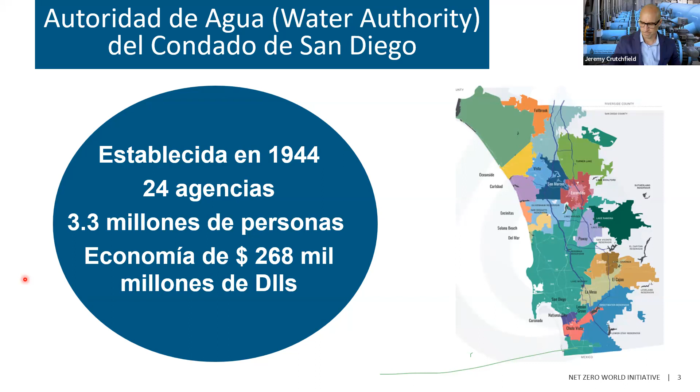A lot of our water comes from the Colorado River to the east, and also from the State Water Project in the Sacramento Bay Delta in the north. So there are a lot of pipelines and pump stations to get that water down to San Diego—that's one of our challenges. Being a large economy with a large population, water supply is very important, and we have to do a lot of planning to make sure we have that water.

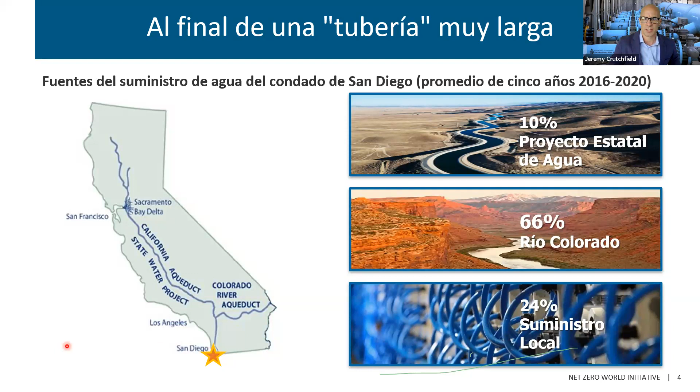To tell our story, we look back 20, 30 years at the path we've taken to diversify our water supply. In the 1990s and earlier, nearly all of our water was imported from outside the region. We bought water from the Metropolitan Water District of Southern California, up in Los Angeles just north of San Diego, and relied on them for 95% of our water, which came from the Colorado River and the State Water Project.

In the early 90s, we were in the middle of a multi-year drought. We were cut back about 30%, losing 30% of our water, with the potential to lose up to 50% of our water supply for San Diego. That impacted everything—our businesses, our agriculture, our quality of life in San Diego.

Fortunately, in 1991, we had what we called a Miracle March. We got a lot of rain that filled our reservoirs and took us out of drought. But our business community, our farmers, and our residents said never again, and they tasked the Water Authority to diversify our water supply portfolio and not be reliant on water coming from outside our region. So over the last 30 years, we've invested a lot of money and started that diversification process.

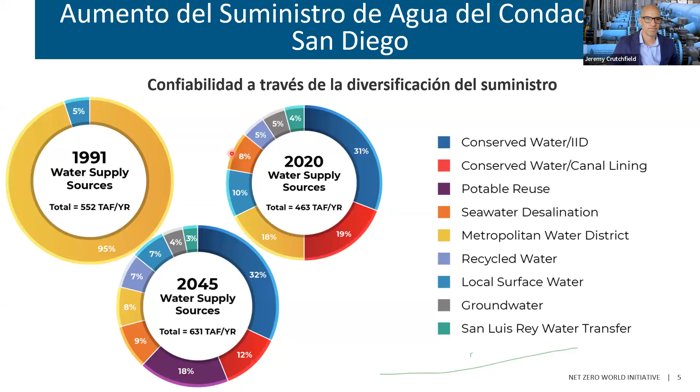So why seawater desalination? The main reason is resilience and reliability. The Pacific Ocean is the largest water source in the world, right on our doorstep, right outside our windows. So we had immediate access to locally controlled, locally available water. It doesn't depend on snowpack, it doesn't depend on rainfall—it's always there and available.

The process of seawater desalination also produces very high quality water that doesn't have much salt or salinity in it. That's an advantage for a lot of our residents and farmers as well, removing a lot of the salts from the water before they use it.

Seawater desalination also gave us local control of water instead of having to import it from a long way away. And it's something that complements reuse and recycling—seawater desalination is a new supply that can be used over and over and over again through our recycling and potable reuse projects.

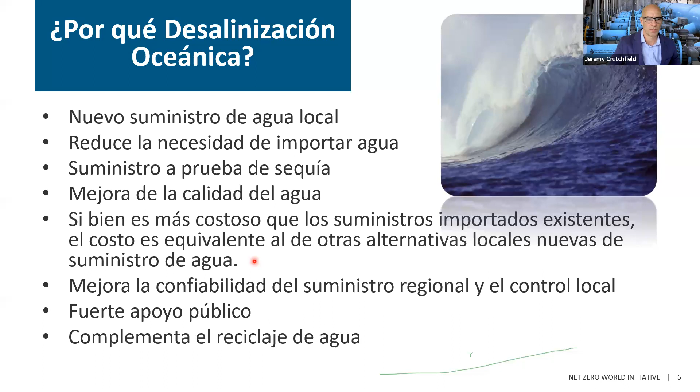Now I'll focus specifically on the Carlsbad desalination plant in San Diego. It's a 50 million gallon per day facility, the largest seawater desalination plant in the United States. We talk in acre feet when we talk water. One acre foot of water is enough to serve about 2 or 3 families for a year, just to understand the quantity we're talking about. This facility can create 48,000 to 56,000 acre feet per year, enough to serve about 400,000 people in San Diego County. Again, this is 10% of our water supply.

The facility was developed through a public-private partnership, meaning we partnered with the private sector to build and develop it. As a public entity, we're pretty risk averse. We know how to move and distribute water, but treatment is not one of our expertise areas, so we leveraged the private sector to build, develop, and operate this plant. This also meant the risk transferred to them, not only operational and development risk, but they were required to permit and finance the facility.

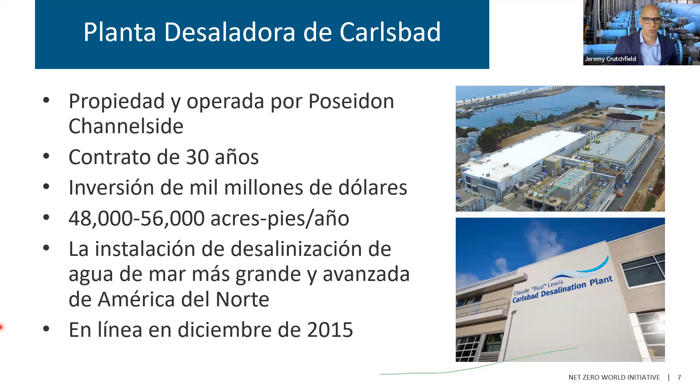A little about the contract and the partnership with the private sector: the Water Authority is under an agreement with Poseidon Channelside as the private entity. They were responsible for developing, permitting, financing, and now operating the facility. They hired a contractor to design and build the plant, and also hired IDE Technologies to help design and operate it. IDE is an Israeli company that owns and operates many seawater desalination plants around the world, so they're a very reputable company.

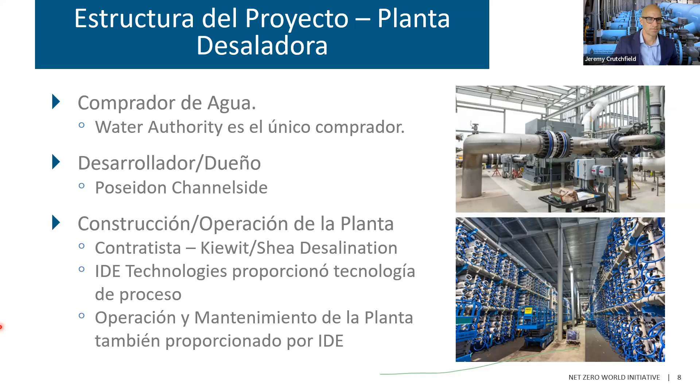The Water Authority's infrastructure, however, is not along the coast, so we also had to build a 10-mile pipeline to bring the desalinated water into the Water Authority's system. Pipes, water movement, and conveyance are things we do know, so we entered into a different type of contract to design and build the pipeline. But once it was constructed and commissioned, we took over operations. We actually own and operate that pipeline; we just don't own and operate the plant directly.

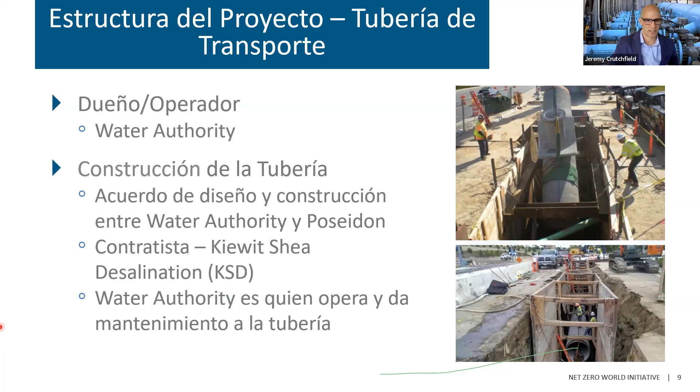I talked about the economy of San Diego, and one thing the business and farming sectors mentioned back in the 90s was that water was a very valuable and necessary component of their success and the growth of our economy. Water reliability was something we prioritized, partnering with business and industrial sectors to promote and achieve diversification of our water supply. San Diego has a large economy with agriculture, biotech, manufacturing—pretty much any sector of the economy or workforce you can think of is in San Diego, and water supply touches all of that.

But it's not just the water supply that ties to our economic growth. The facility itself produced a lot of jobs and opportunities. The construction of the plant introduced about 2,500 new jobs to our communities in San Diego, a lot of those in the trades. One thing we're seeing in the US, but specifically in California, is our trade sector aging, getting older. So we're really trying to get younger students to look at the trades—becoming a welder, a pipe fitter, an electrician. Those are great jobs, and a lot of those were hired into the development and construction of the desalination plant. We also have to look at all the different vendors, suppliers, sales force, and other indirect jobs created in the construction. It took 3 years to construct, so it was a large engagement of different trades getting into the project.

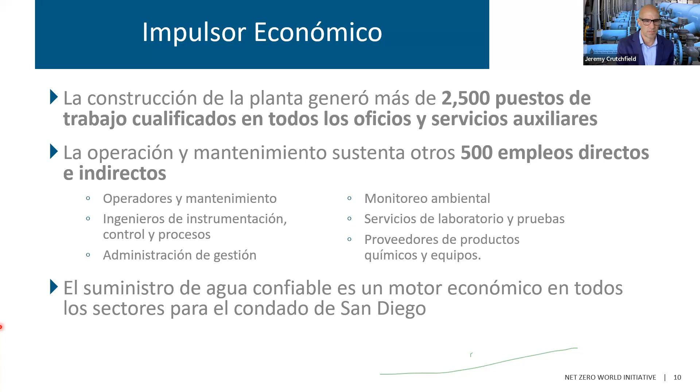The operation of the plant also employs a lot of different players. Only about 45 to 50 full-time staff are at the plant to operate the facility, but you have to look outside of that too—the folks doing monitoring, testing, lab technicians, supply of chemicals, materials, equipment, vendors. There's just a lot that goes into operating and maintaining a facility of this size, so you're again looking at a lot of job growth in our area and economic opportunities related to the facility itself.

Now, this schematic shows how the construction of the facility was integrated into the regional system. A lot of times when you look at seawater desalination, people believe that it's just the coastal communities that get the benefit of the high quality water. That's not necessarily true for our facility.

As I mentioned, here on the left you can see where the desalination plant was constructed right along the Pacific coast. We built a 10-mile, or 16-kilometer, pipeline to connect to our infrastructure inland. We brought that water up north to mix and combine with all of our other treated water that comes into the San Diego region. We have multiple different supplies, and this is a traditional treatment plant up in the northern part of our service area. We blend that desal water at this location and then serve that blended water to the rest of our community.

About 95% of our customers get some component of desalinated water when they turn on their tap.

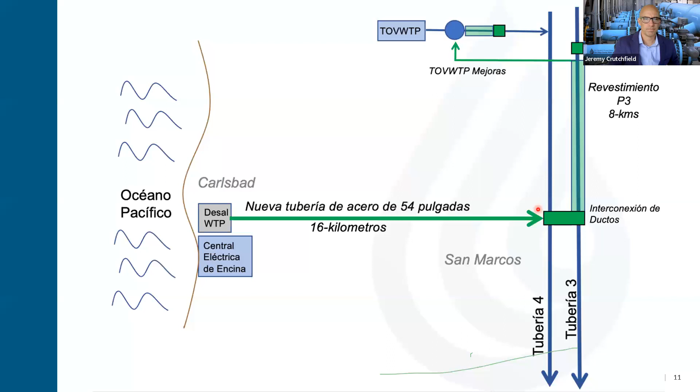Now we can talk about costs a little bit. The total program to implement and integrate seawater desalination into our regional system was about $1 billion, and this is back in 2015 dollars. The plant itself, the construction cost, was a little over $500 million. The pipeline was about $160 million.

But then you need to look at the cost to finance this. The way that the private sector recovers its investments in the facility is by selling us water. So they are making money, as we purchase the water, we're slowly paying off the debt and the equity that was put into the plant. There's a 30-year financing element, and $200 million is needed for that.

And then for the water authority, we also had some improvements that we had to do in our system to receive the seawater desalinated water, and that was another $80 million. So the total price tag for us was $1 billion.

When you convert that to how much we pay for water from the facility, again we talk in acre feet, we pay about $3,000 per acre foot. That's less than a penny per gallon, 1 cent per gallon. So while it is our most expensive supply, it is equivalent to or similar to other alternative water supplies that we're looking at. Cheap water is not out there anymore.

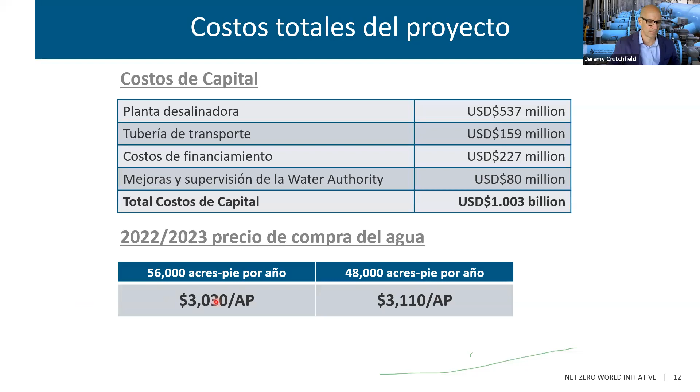I wanted to show the schedule or process we went through to implement this job, because it took a long time to build the Carlsbad desalination plant. A lot of this is because we're in California. There are a lot of environmental and regulatory analyses and engagements that you need to go through before building a facility like this. You won't see this long of a timeline in a lot of the other places of the world, but in California this is a reality for planning and implementing seawater desalination.

As you can see here, we started thinking about this in the late 1990s, and again, we didn't have it constructed and placed into operation until 2015. A lot of that is because of the environmental review and the regulatory permits that we need to get to build and operate this type of facility.

We had a lot of engagement with the regulatory community, with the environmental community. They have a lot of concerns about seawater desalination, and so we have to work with that community to demonstrate that we're implementing all the right protections and engagement points where we interface with the ocean, both with the intake of water and the discharge of water, which I'll talk about more in the future. So there's a lot of review and a lot of monitoring that we have to do once it's in operation, but figuring out what that looks like takes a long time.

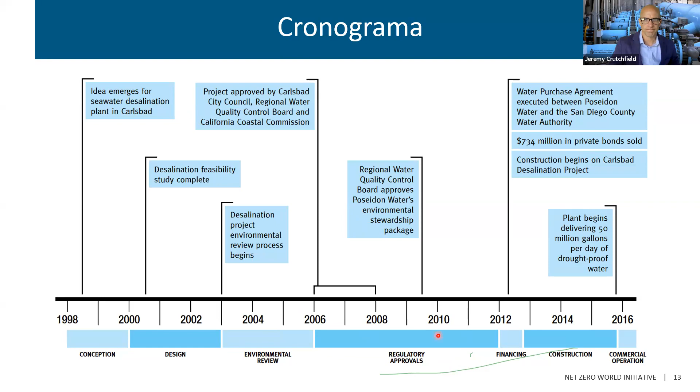This is a photo of our facility, the desalination plant. There was a power plant right next to the facility, and that was strategic—the desal facility was co-located with the power plant. The main benefit is the power plant was already bringing in water from the Pacific Ocean, so the intake and discharge infrastructure was already there. We didn't have to build that or pay for that. We just needed to tap into their discharge and pull that water in for seawater desalination.

So how this process works at this plant: we don't have pipelines out into the ocean. There's a lagoon here that was developed to support power generation back in the 40s and 50s. You can see the intake of the lagoon up here, so water comes into the lagoon. The intake for the power facilities is right here—they go into underground channels, go through the plant, and then out the ocean, out the jetty. The power plant is actually no longer in operation, so the desal plant is now generating that flow of water into the lagoon and up to the plant.

The facility brings in about 100 million gallons per day to generate 50 million gallons of high quality drinking water. So about half of the water that's brought into the plant goes back out into the ocean as concentrated seawater, also known as brine. We have to dilute that water prior to it going out to the ocean. I'll talk about our monitoring and how we ensure there is no impact in the ocean from this discharge in a future slide.

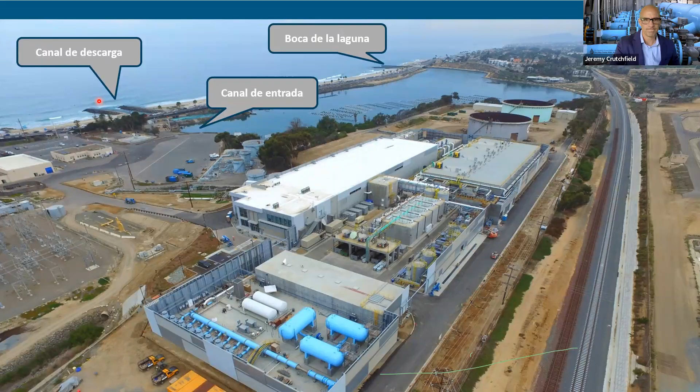Yep, it is. So what this is showing, again, here is our desal facility, and here's the lagoon that brings the water into the facility. This is where we discharge that brine.

So this is a heavily regulated facility, and what we need to ensure is that we're not impacting the marine environment or the ocean with the operation of this facility. As a public entity, the Water Authority's job is to provide a reliable and safe water supply, but we are also stewards of the environment. So it's really important to us that our interface with the environment, whether it's lakes, rivers, or the ocean in this case, is sound, and that we're not producing any unintended impacts to those areas.

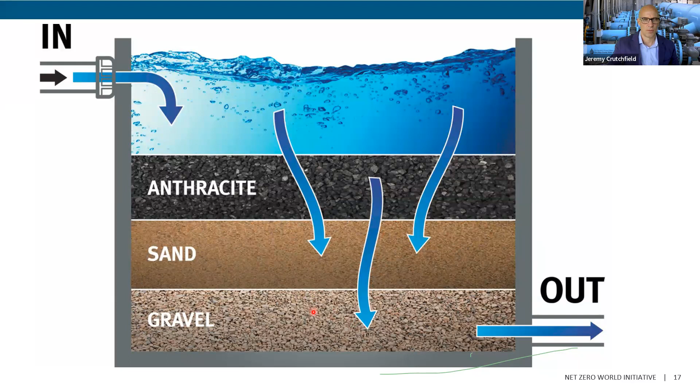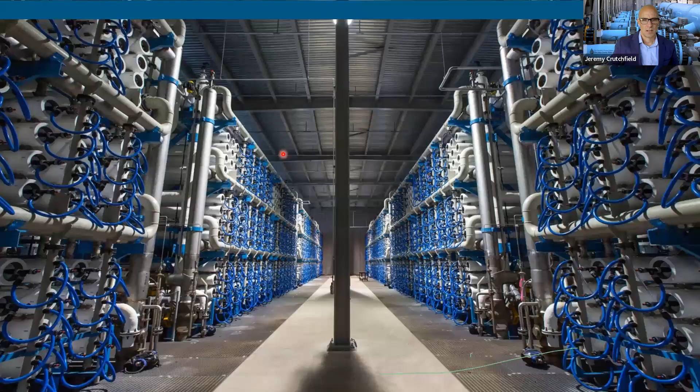This part of the building is our reverse osmosis, and it's the heart and muscle of the facility. This is where all of the salts are removed. And to do that, you have to pressurize the water up to 900 pounds per square inch. That's a very high pressure, and that's the main reason why seawater desalination takes a lot of energy to produce the water.

These reverse osmosis membranes are modular. So if you want to make the plant smaller, you just remove some of these. You can make it bigger. If you have the footprint, you could make this as large as you'd like to.

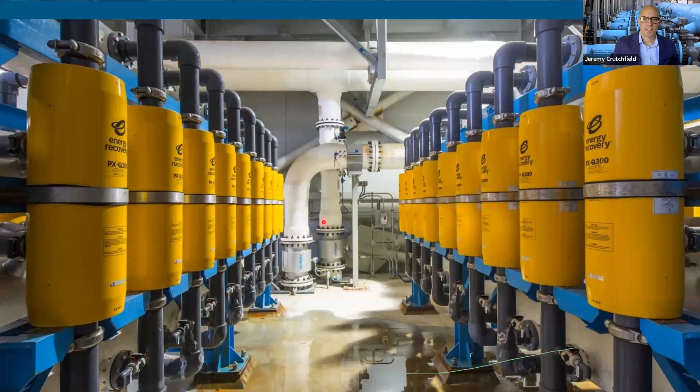This is one of the innovations, and innovation is key into seawater desalination. We do not have many seawater desalination plants in the United States. And one of the reasons for that is because it's a pretty expensive water supply. And the big driver of that is electricity.

These energy recovery units actually reduce the amount of energy you need to run a desal plant by about 45%. That's because it's harnessing energy that is put into the plant through the reverse osmosis process and putting that energy back into the upstream flow so you don't have to pump that water. It's a complex process, but it has significant benefits in that it reduces how much energy you need by 45%.

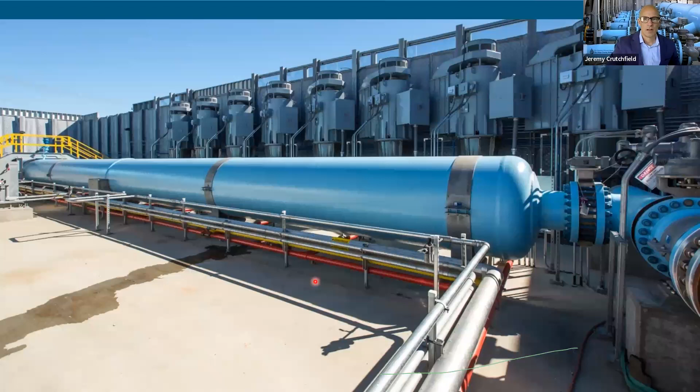What you're looking at here is the last phase of the project plant itself. These are vertical turbine pumps, and this is how we get the water up to and into the regional system. They have to pump the water 15 miles up about 1,000 feet, and there's no pit stop in the middle. These pumps do all that work, and this is the size of the pipeline. It's a 54-inch pipeline that is bringing that water into the regional system.

So as I mentioned, this facility provides about 10% of our water supply. It's been in operation for 7 years, and we've collected a lot of data, a lot of information about seawater desalination through this facility. And we've shared that with a lot of different people who are interested in looking at or pursuing seawater desalination, not just in California or the US, but other parts of the world as well.

It's a facility that we're very proud of. It has won a lot of awards for the Water Authority and for the community in terms of its resilience and reliability.

We've just come out of another extended drought where we were looking at water cutbacks in California. And this facility, we're looking at it as not being the silver bullet for water resiliency, water reliability, but for improving that reliability as being part of the puzzle, part of the answer to achieving a resilient water supply.

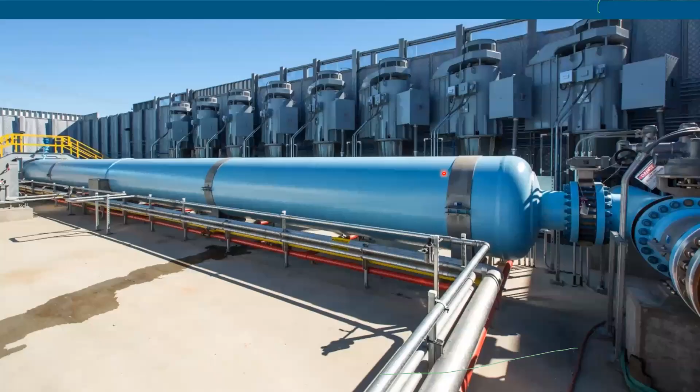Thank you, great question. I did not get into much detail on that, so thank you for bringing me back to it. There are two ways, two technologies or means of configuring your discharge from the seawater desalination plant.

Most plants have a pipeline that goes out into the ocean a certain distance, about 1,000 meters, and then has dispersion facilities at the end of the pipeline that disperse the brine discharge so it doesn't have a localized impact at that discharge point.

However, at this facility, we use dilution to meet the regulatory requirements of our discharge. At the plant, we have 100 million gallons per day coming in, 50 million gallons of drinking water produced, and 50 million gallons of brine. Before the water even gets out to the ocean, we dilute that brine 5 to 1, bringing in additional seawater to blend and dilute the brine before it goes outside this rock jetty and enters the ocean.